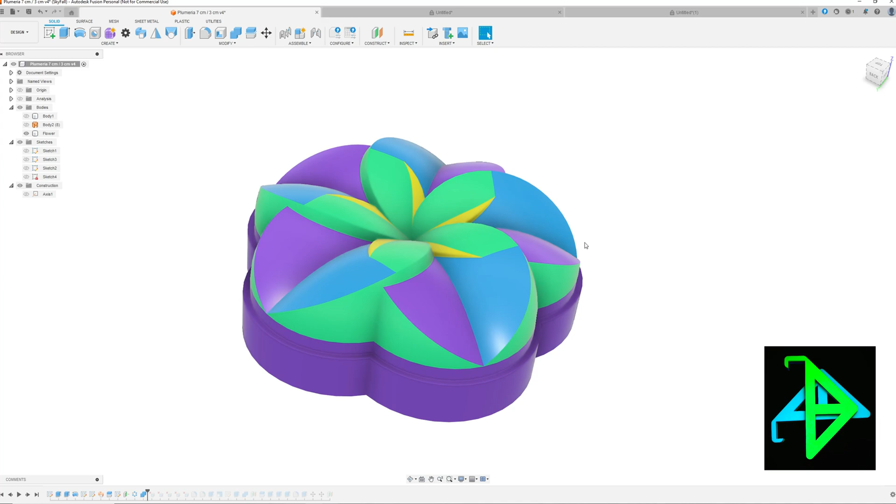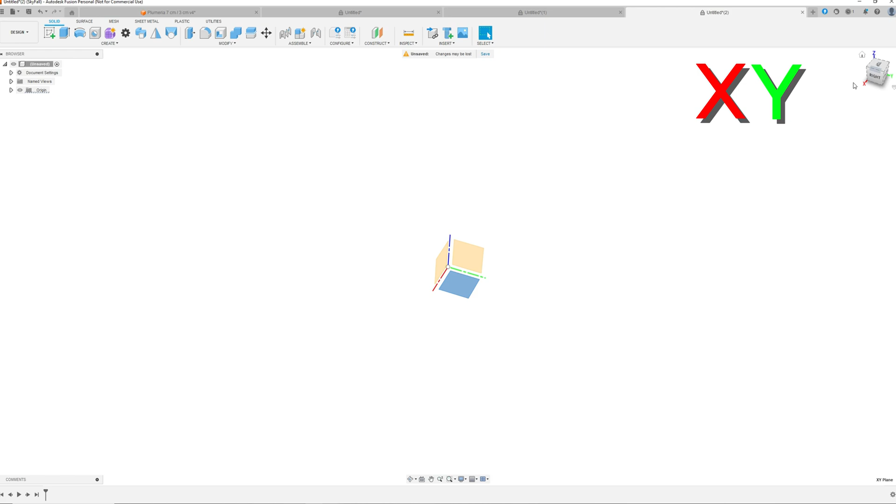Let's go to create new design. For this model we're going to need all three planes available in Fusion. To make them visible, just press this little eye here. So for the first sketch we're going to be using plane XY, red and green. Second plane is XZ. And third one, ZY. Okay, starting.

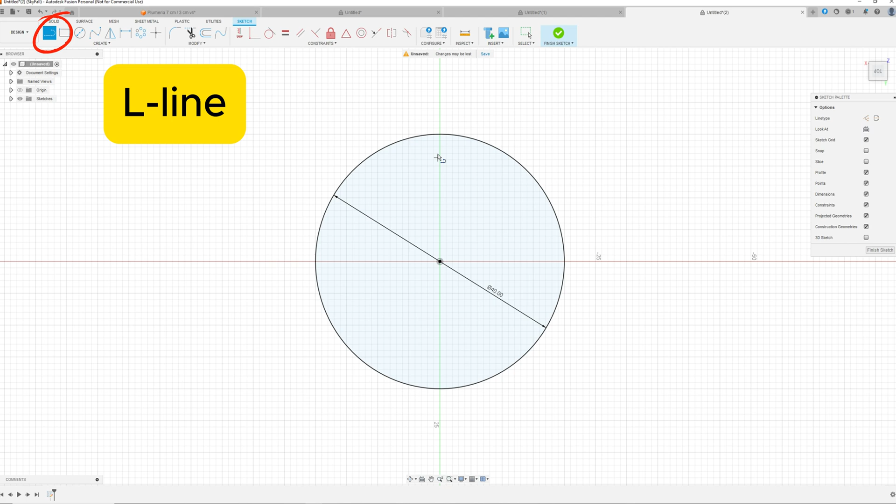Create sketch. We can hide this. Okay, we need a circle, 40 millimeters. We also need a line dividing this circle. One more circle, 43 millimeters. Finish sketch. Sketch number 1 is ready.

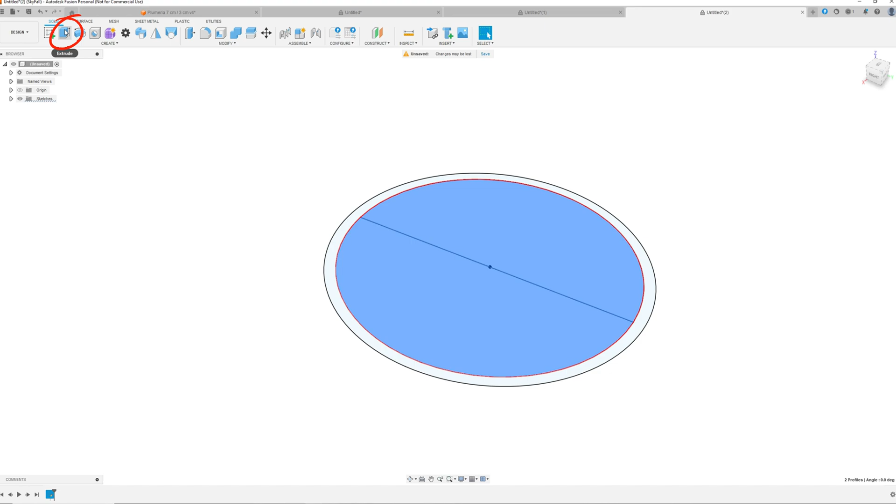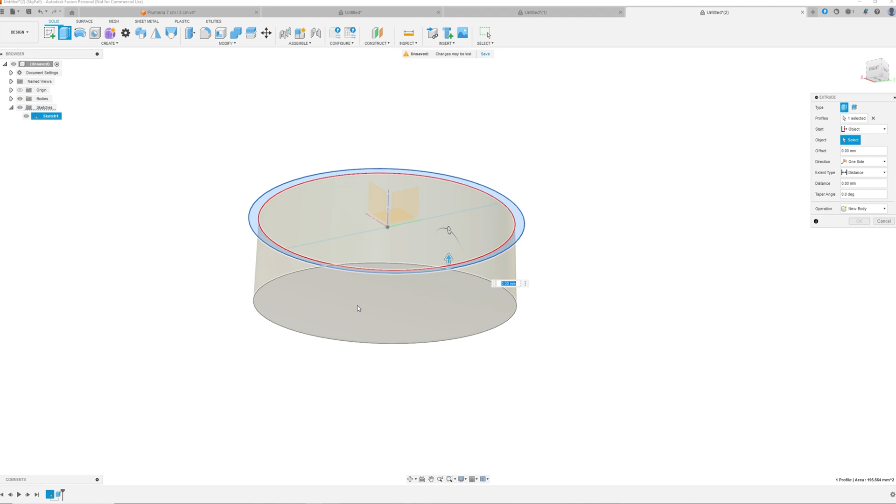Next we need to extrude a cylinder. Let's choose this profile, hold Ctrl, select one more profile, then go to extrude. We're going down minus 13 millimeters. We're having a cylinder. Then make sketch visible. Choose one more cylinder, extrude, but this time we're starting not from profile plane but from object, from the bottom, going up 10 millimeters. Join. Okay, we have it.

Next, choosing this profile and using the revolve feature: revolve, choosing axis, the middle line, partial, 180 degrees, join.

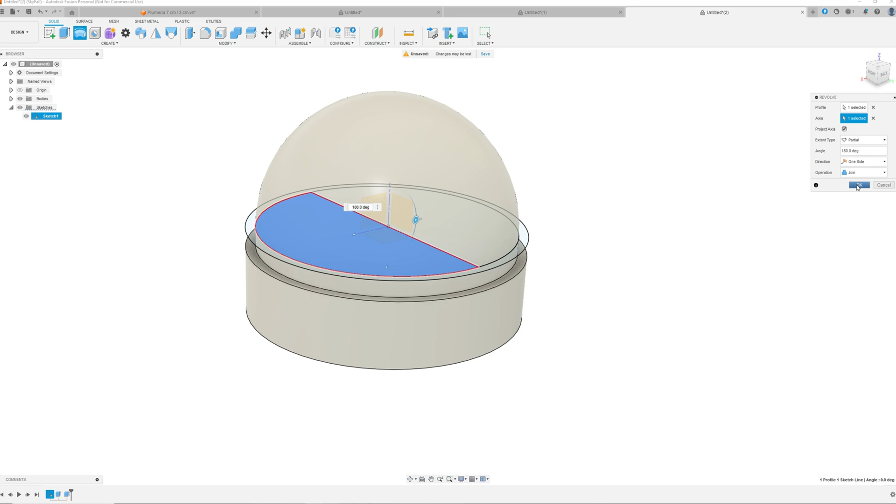Next step is to create a second sketch. Pressing N, new sketch, choosing XZ plane, red and blue. You can choose it by pressing when it's getting a little bit white. If you have any difficulties, you can just make a long press with the left button of your mouse and press XZ.

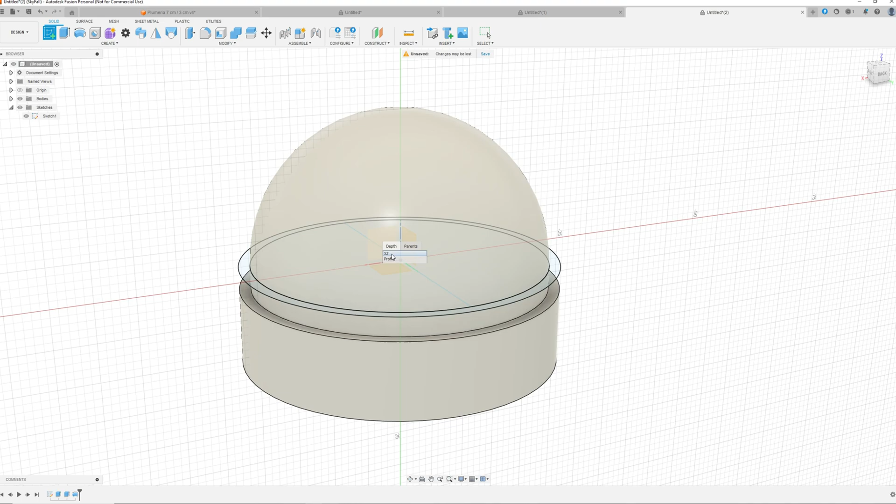Okay, then we need to project our body. We go to create, project, P, project bodies, choosing body. Now we can hide the body.

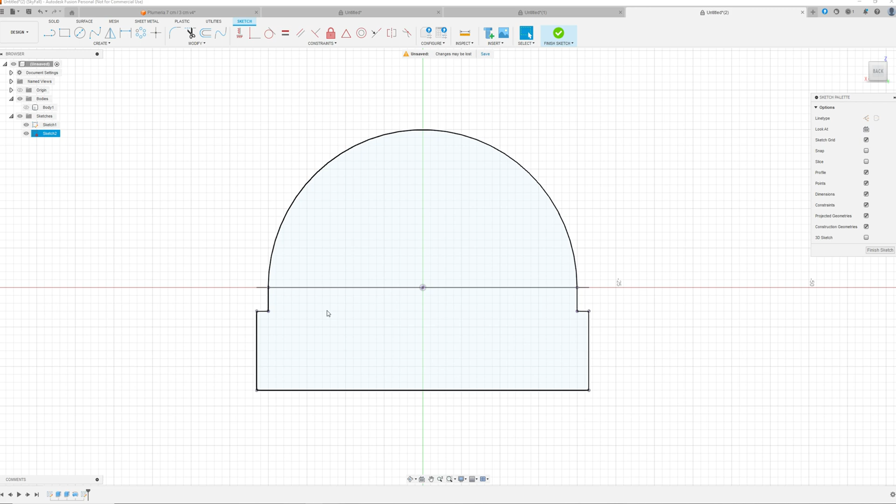Then we need to create a curve for our petal. We're going to use a fit point spline, starting with this point, going here. And we have a magnet on the middle which is very helpful. Let's not make it symmetrical, so this point is higher than this one. Finish. Sketch number 2 is ready.

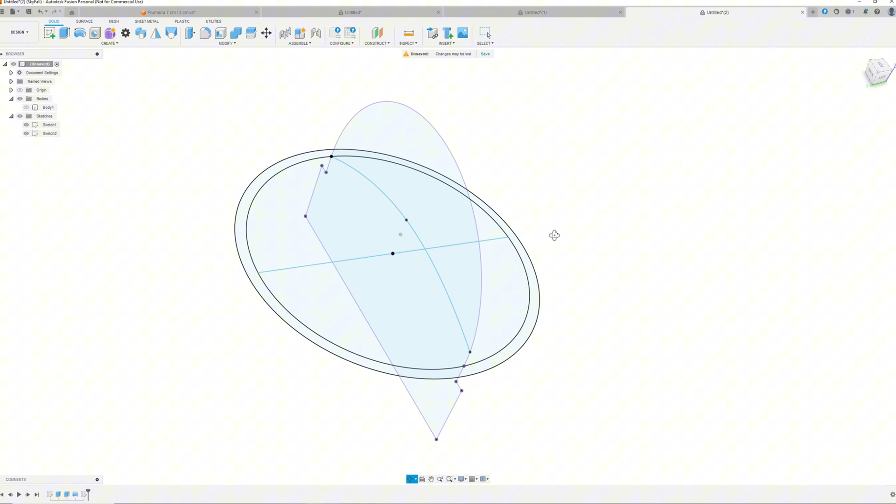Last one, sketch number 3: N, new sketch, plane ZY, blue and green, ZY, P, project, not bodies, geometry, choosing geometry. Next we need to project the body as well, P, project bodies, body 1, okay.

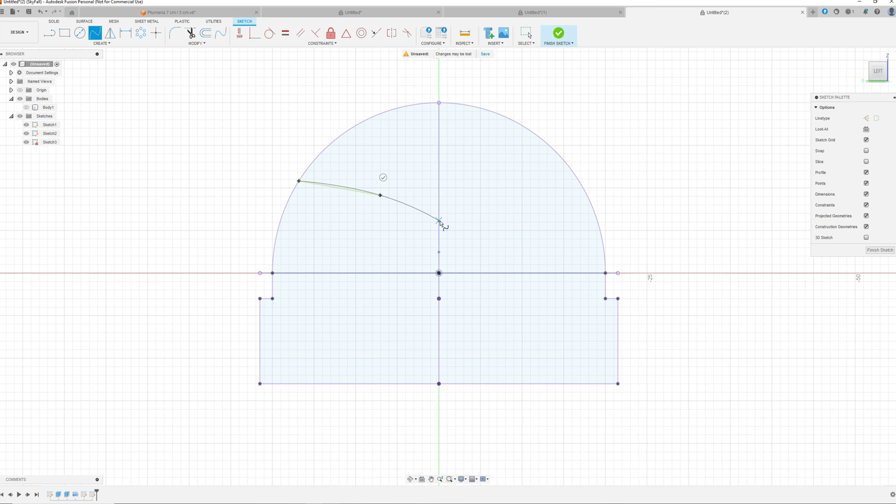Now we're making the petal using the same tool, spline. This is the top of our curve, this point. Remember, this point is the top. We do like this, and I cannot press on this point because it's not projected. Escape, project, P, geometry, point, top of the curve. Okay, now it's projected.

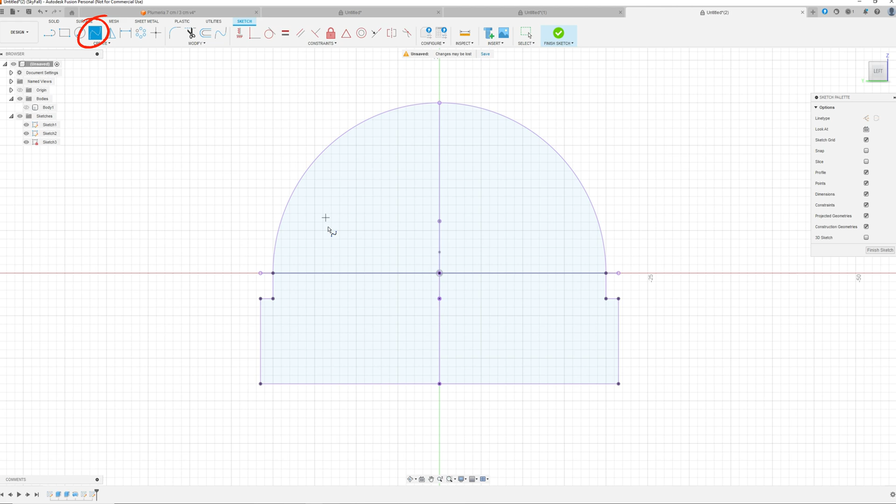Fit point spline, randomly making a curve. First curve, ready. Second curve, not symmetrical, a little bit higher, and to the side. Ready. We can adjust it later, no problem. Finish sketch.

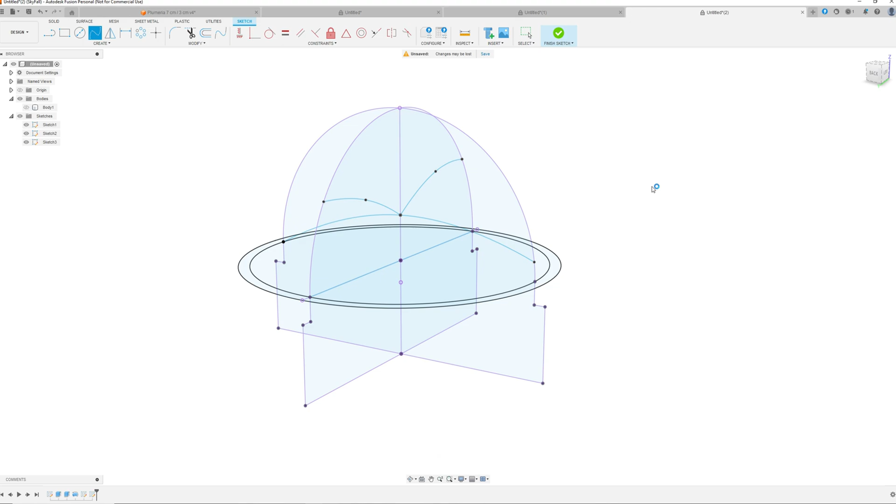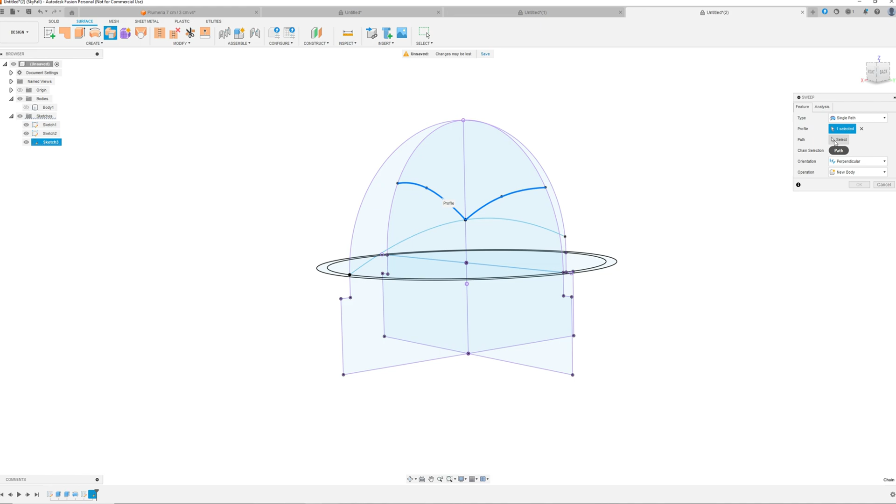We have 3 sketches which are helping us to create a 3-dimensional flower. Next step we are going to surface modeling, choosing sweep, single path, profile. This is our profile. Path, this is our path. New body. Making body visible.

Then we're going to solid. Modify, split body, choosing body to split, choosing splitting tool, our surface. Pressing OK and getting an error. So let's do it one more time.

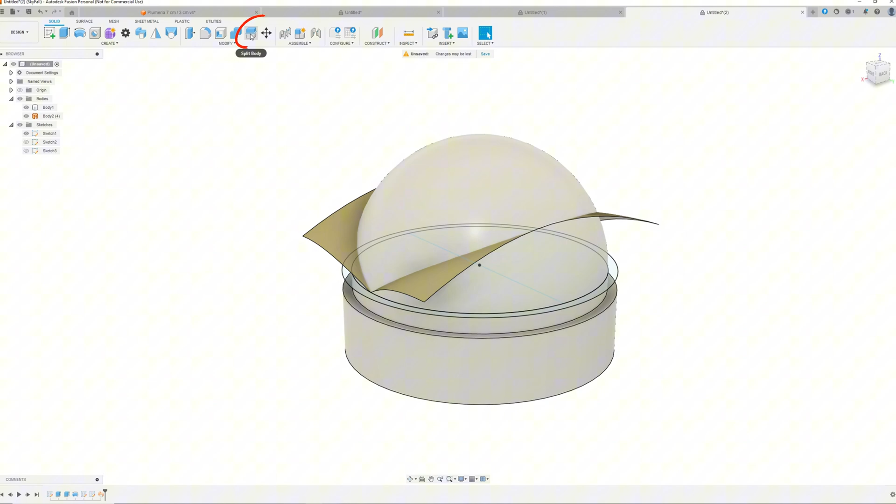Choosing split body, body to be split, this one. Splitting tool, this one, and then extend splitting tool. Okay, ready. Then we can make invisible unnecessary bodies: body number 4, no, body number 1, and this surface. Okay, we have one petal.

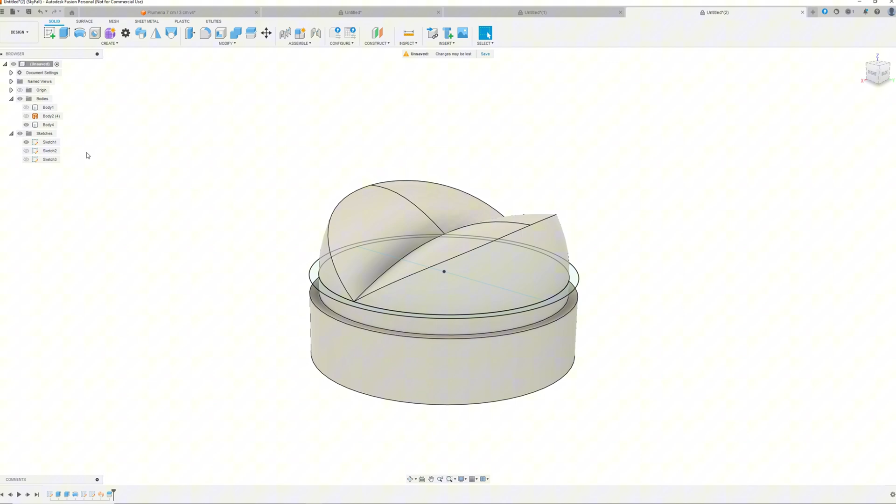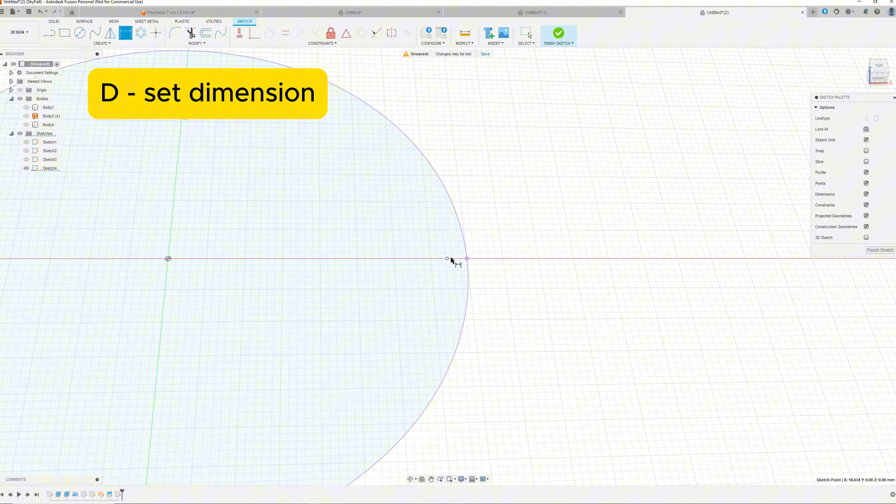What we do next: we create a sketch, plane XY, red, green, project this circle and this point. Make the body invisible and create a point 1 millimeter distance from this point, finish. But now we need to make an axis perpendicular to face at a point. Face, point. We have an axis perpendicular.

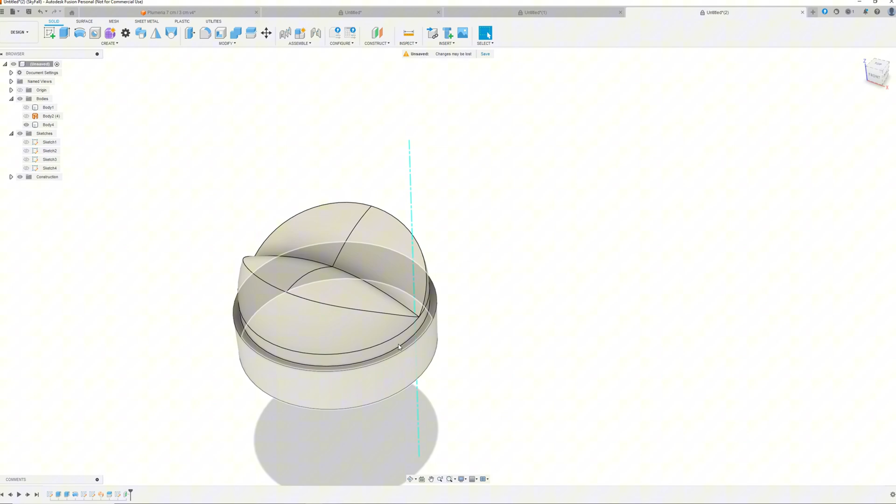Toggle up the body. So now we can go to create pattern, circular pattern. Choose bodies, this is our body. Axis, this is our axis. 5 petals. Okay, good. Hiding axis. So we have our flower.

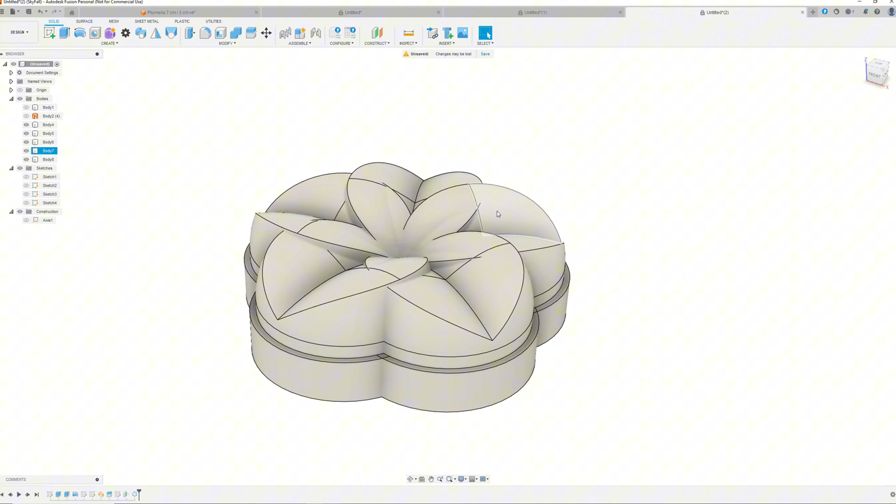To make it prettier, we can press Ctrl 4. We can leave it like this, or we can adjust the curves and make it a little bit different if you want. You can just make it different along the way. Okay, like this. And the final touch is painting.

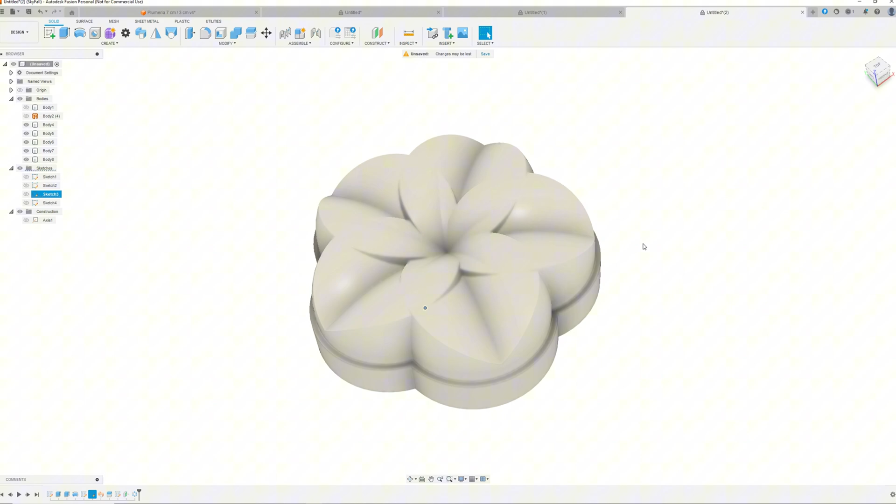So we can go to appearance, modify appearance, or just press A. By default, the flower is having a white color. We can just make a double click, go to yellow for example, done.

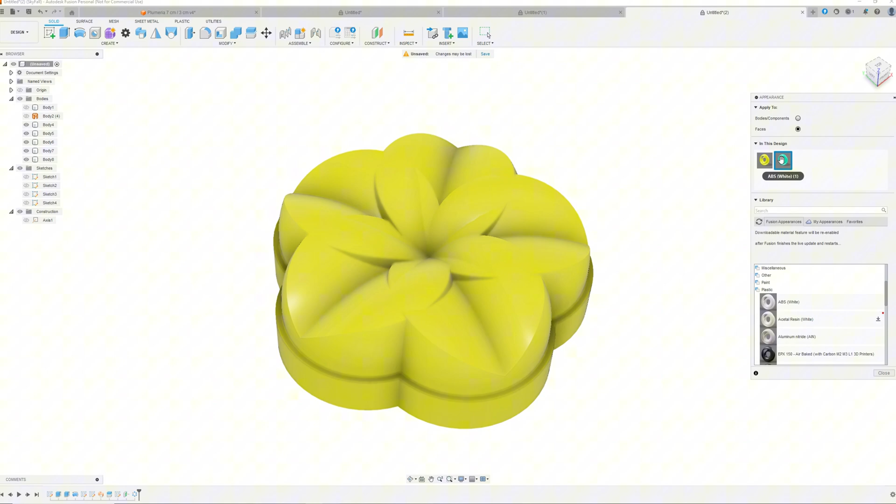If you want to make something like this, you need to go to appearance again, choose faces, duplicate this color, for example duplicate, double click, choose a different color, done, and then just drag it to a face to be painted with a specific color, so you get different results.